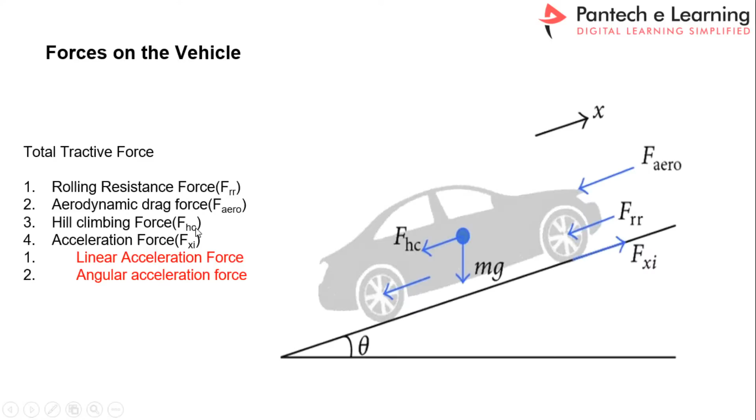Now let's start the discussion, continuing yesterday's topic. Whenever you want to calculate the total motor power, the exact required motor power, you should know all the tractive forces. What are all the forces available on the vehicle? The first ones are rolling resistance, aerodynamic drag force, hill climbing force, and acceleration force. These are all the forces which we have to calculate.

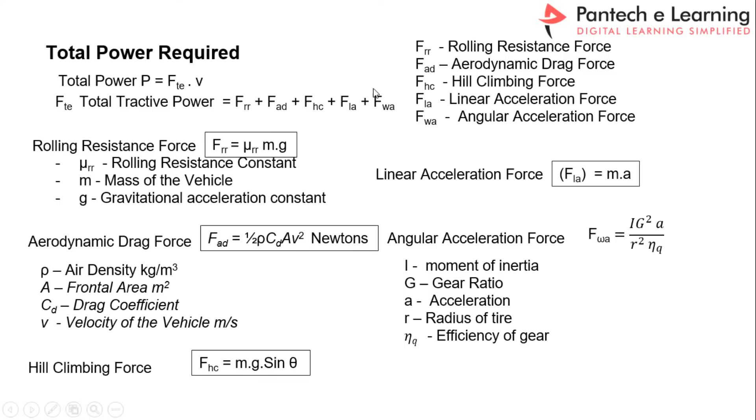Now just to recap the formula: the total tractive force Ft is equal to the sum of rolling resistance force, aerodynamic drag force, hill climbing force, linear acceleration force, as well as angular acceleration force. This is the total tractive force. If you multiply all these forces with the velocity, then you get the total tractive power.

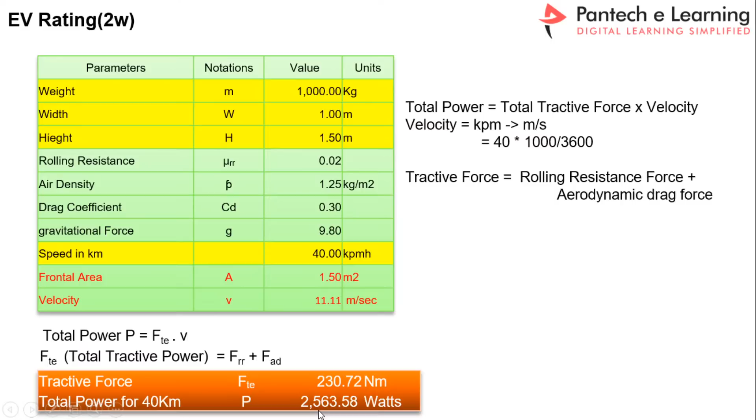Let us take the same example. We can calculate the total power for the 40 kilometer - the power required to climb 40 kilometers. Of course we need 2.5 kilowatt motor power if you apply the formula.

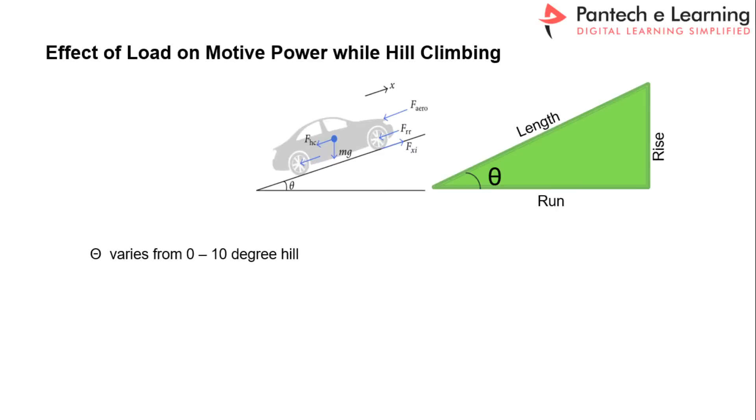Now if you include the hill climbing force, what will happen? Let us check one by one. Here I will show you the calculations, how you can develop the calculator. Just a second, I will show you the calculator.

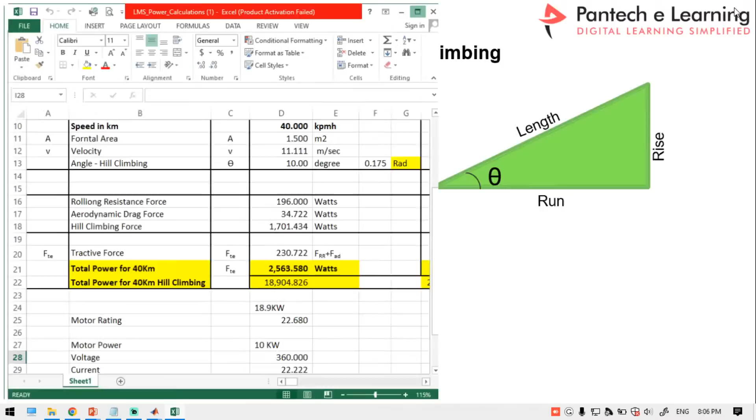So now we are going to analyze how the power may increase when you slightly introduce the grade angle. Let us take the same value and compare the same dimensions of the vehicle. Whenever your vehicle crosses that grade angle, whether it is upgrade or downgrade, not a problem at all. But when the vehicle is on the upgrade, then you need more motor power. So how can you calculate that power?

So here the angle should be converted into radians. To get the radians, you just take the particular degree and multiply by pi by 180, so that you get the radians. That is called theta.

So for the hill climbing force, if you have not compared, then without hill climbing, the motor power requirement is only about 2.5 kilowatt. Suppose if you are introducing a 10-degree grade angle, then you may require a higher value than that. See here, this is the total exact motor power.

So you have to calculate all the total forces. M into G, and I just add this value. See here, about 21.4 kilowatt motor power may be required. So this is the power variation.

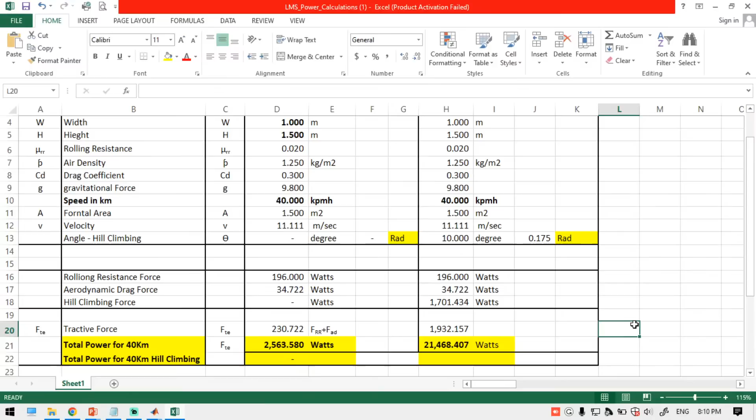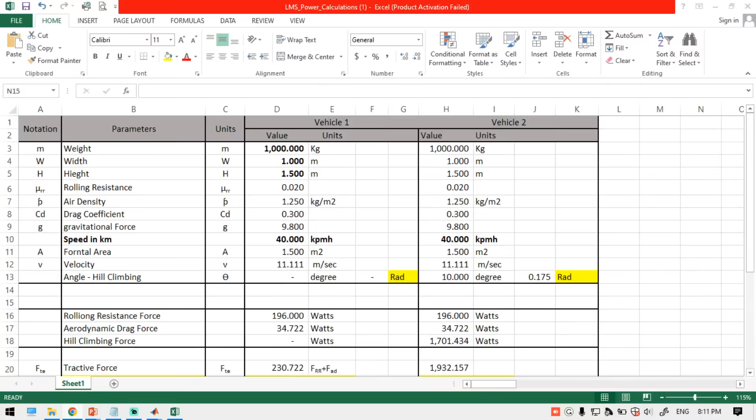Yes, so Amrita, what is your query? I couldn't... just a second. So the solver error, model error denotes that you have not included the f of x solver. So just include that solver into your any ground plane. In the Simscape workspace, you should include the solver.

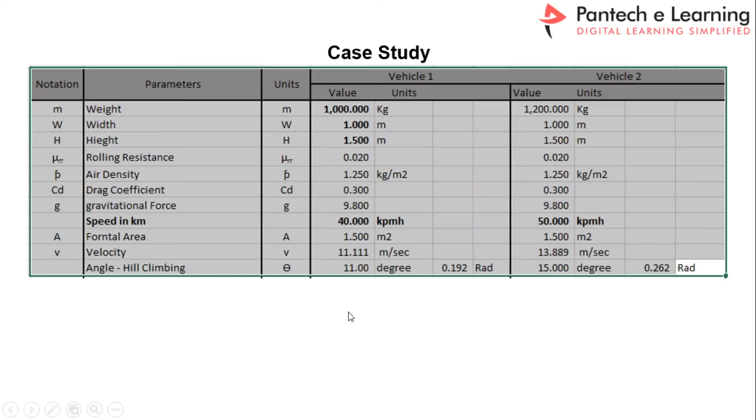So now let us take that simple case study, so from this you can easily understand the power calculations. From the power variation, the same may happen when the vehicle is in hill climbing conditions, when the vehicle is fully loaded to the unloaded conditions. So these are all huge power variations that may happen when you drive your vehicle on the road.

So how can you consider those conditions? Here, if you take the extreme conditions, which means if you are claiming 100% motor, for example 1000 kg loaded at a certain 40 km per hour, then in that case what do you have to do? You have to add 20% extra.

What do you have to do? You have to add 20% extra load, so in that case 1200 is the total load capacity of your vehicle. At the same time, for the gradients also you should increase the higher percentage. Then only your vehicle will get higher stability.

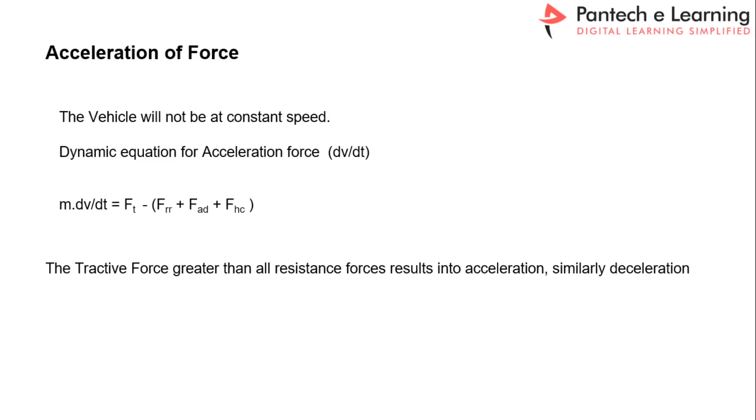Here, since the vehicle is not going to be at a constant speed, there will always be a change depending on your driver input as well as the road conditions. So now we are in the position to calculate the dynamic speed of the vehicle.

So while you design your vehicle, you should take all these factors into consideration. Now let us take this one, see here.

It's about 350 kilogram will be the total value. So this is the 250, this is the 350 value. Let us take the 350 value, and now let us try to solve this one.

See, the gradient is in the negative gradient, so the speed will be in the positive. Let us assume this is 40 km per hour.

Suppose if you increase the vehicle weight, instead of 350 kilogram, to 1000 kg, let us check what will happen.

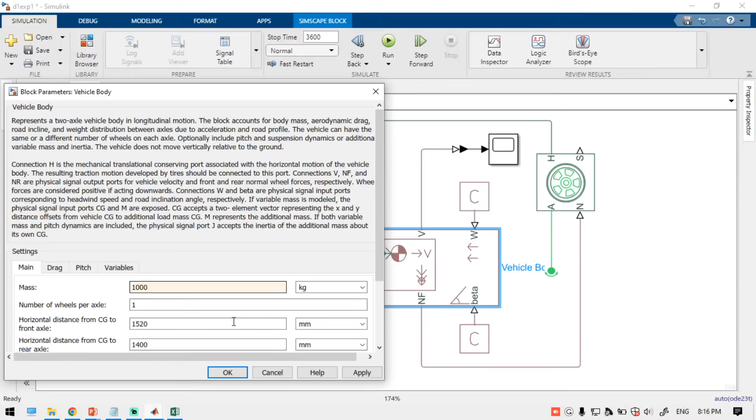So definitely, if you increase the weight and put the vehicle in the down gradient, what will happen? Can you just comment? If you increase the vehicle weight and put the vehicle in the negative gradient, what will happen? Can you comment whether the speed will be increased or decreased? Can you say yes or no?

The speed will get increased or decreased. Earlier it was 40 km per hour, now I have increased the vehicle weight. So now see here, earlier case it was 40 km per hour, right? Now the speed has doubled, about 70 km per hour, because the vehicle weight did not decrease, it increased. Yes, exactly, Mr. Darshini, that's the answer. So the speed will get increased due to the vehicle weight increase.

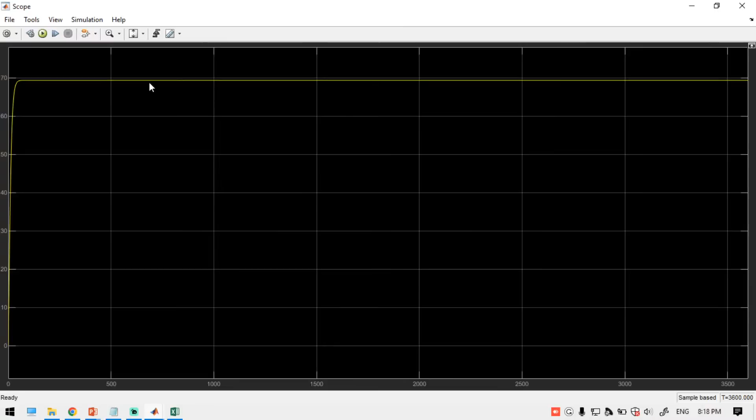Same way, in that case we need more motor power to operate your vehicle. Now let's come to the point: if you want to drive a motor, this should be positive, then the motor will get forward direction. If this should be 0, then the motor braking will get applied, and the motor comes to the standstill position. Like that we can understand the dynamics of the behavior.

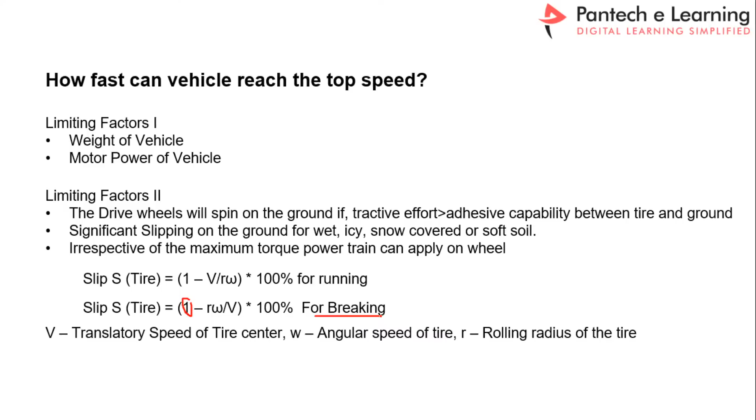From this calculation, at the initial stage the motor torque and speed will be 0, this is the 0.0 position. Now you have started your vehicle. What will happen? See here, the speed will be 0 and it will try to increase maximum from 0 to maximum.

So the speed will get increased from 0 to maximum. In that situation, what will happen? Whenever the speed is very low, the torque should be high. That is the motor's responsibility. The maximum torque should be delivered by the motor till its critical speed. Do you know what is critical speed? The critical speed is nothing but the rated speed with the rated condition, loading conditions. That is the critical speed.

So this region is called the constant torque region. During this region you can handle the maximum load, but the speed will be less. After the critical speed, the speed can increase at a certain stage and not more than that value, but you can go more than 20% of the rated speed, though the loading capacity may get reduced.

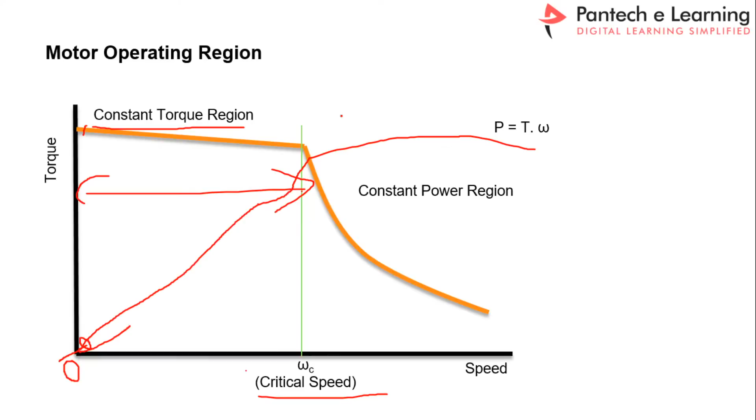From this graph we can easily understand that the motor has a critical capacity, a critical speed behavior. Till that critical speed, the motor will deliver maximum torque and maximum speed. This is the safe operating region, where you can handle both values - you can operate the load and you can operate the speed. But if you need more speed with less load, with less speed available, then this is the region.

That's why your vehicle is in very low speed when you drive it. If you take an IC engine, the vehicle will handle more weight when it is in lesser speed - like first gear, second gear, third gear, it can handle maximum load.

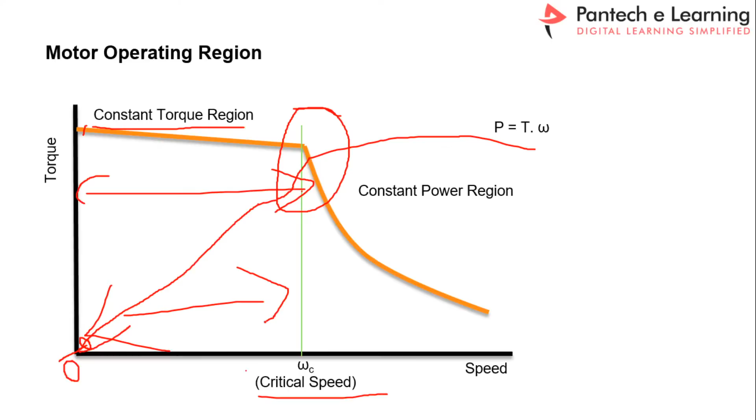Now here I am trying to give you an example of some typical motor data, vehicle typical data - the weight of the vehicle, drag coefficient, rolling resistance, and area. The gear ratio is about 11, the vehicle wheel is about 0.3 meter, and gear efficiency is 95%. For these dimensions, the motor power is 102 kilowatt at 7000 rpm. For this motor we can take 140 Newton meter. This data we have to get from the data sheet.

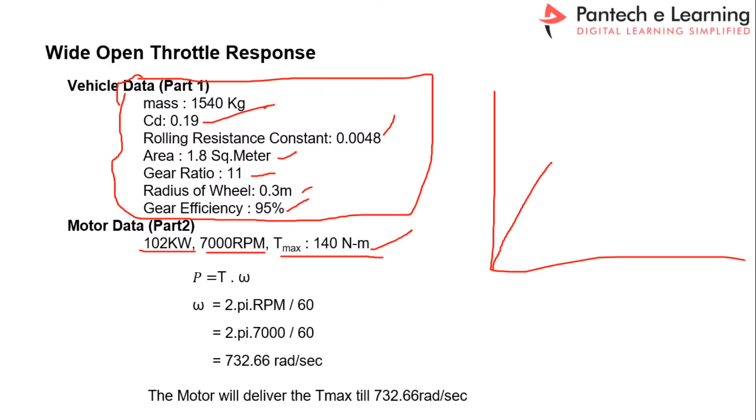So now at what range can the motor deliver 140 Newton meter, because this is the rated torque of the motor? If you apply throttle from 0 to maximum, slowly the vehicle will move, right? So the graph will get linearly increased - this is the radius, so gradually it will get increased. For example, in this region you may get 140 Newton meter.

This region you can get 140 Newton meter. At this moment you can get 140 Newton meter. Let us assume this is the critical speed - like 732.66 is the critical speed, right? Radian per second is nothing but angular velocity, so we have to state it in radian per second. Let us assume this is the critical speed - till that area, the motor will deliver 140 Newton meter. Once the motor increases beyond this limit, then the torque will get reduced.

So the advantage of the electrical motor is that by implementing FOC algorithm, or vector control algorithm, or direct torque control algorithm, you can program the torque as well as the speed. This is the main takeaway from this slide.

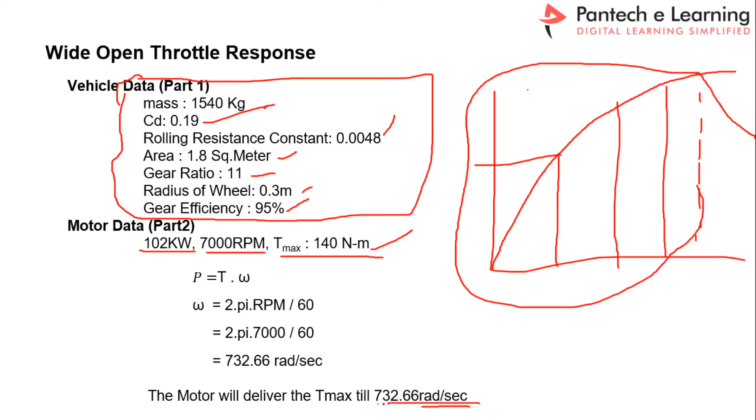And the same way, what is the maximum velocity of the vehicle? The motor critical speed is 732.66 radian per second. The motor is generating the speed rotation, and that rotation has been converted to the vehicle. So now what is the critical velocity of the vehicle? At this range of 140, just apply the simple value and you may get this value - 19.8 meter per second. So this is the critical velocity of the vehicle.

So up to this, whenever you drive in this range - from this you can convert into kilometer per hour. Simply apply the value and calculate it. Till that value you can get an exact full load torque, and there you can operate the vehicle in a very safe zone with the speed and torque. I hope you understood.

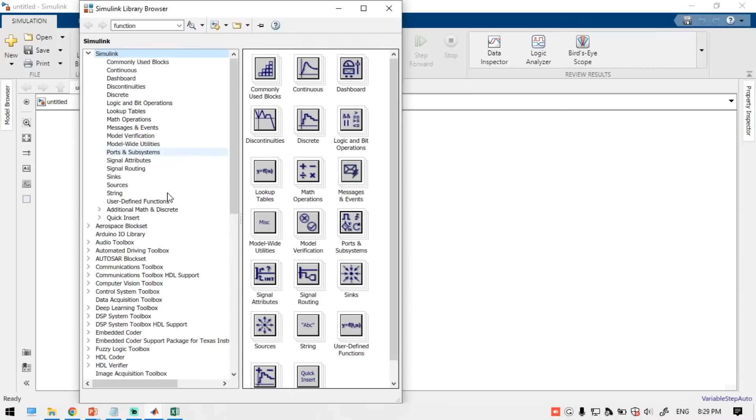See here, with MATLAB you can do any kind of logical operations. So to understand the logical operations, see here, all the mathematical functions are there.

You just click this button and you may get an add block. You can do the add block, and you can take a bits operation called gates, logic gates, all the logic gates.

For different motors, see the motor power is only the constant, so all the calculations remain the same for all the motors. Here we discussed only the vehicle dynamics, not the motor dynamics.

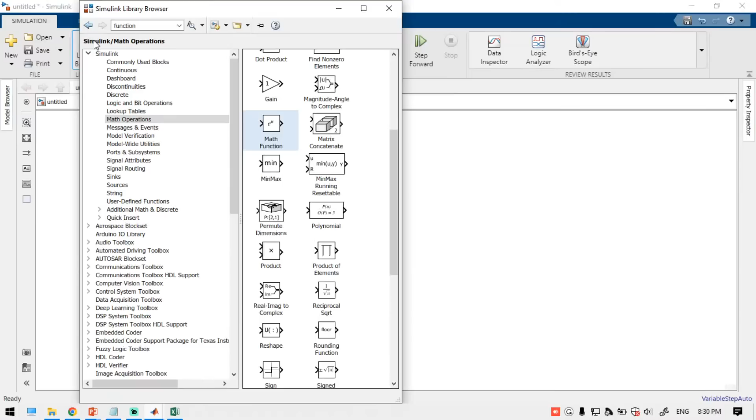So I will show you some simple logical functions, how you can develop them, where you can start. Just take a bits operation, let us take an AND logical operator.

Now I will tell you how to generate and compare two signals. I'm just going to take two signals. One is a square wave, see here, I'm just taking the square wave.

For the square wave, can you tell me what are the parameters? If you take this one, see here, let us assume this is the square wave.

Let us take this as the starting point at t equal to 0. This is the starting point, t equal to 0, and again at this moment t equal to 0, this is called the on time, and this is the off time. Now the entire full cycle is called a period, and this we can call the on time, and this we can call the off time.

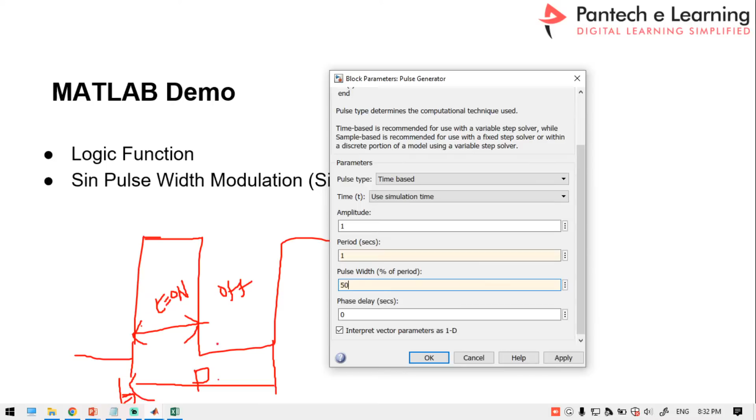This is the on time. People will express it as a percentage of the period. So if you keep 50, that means 50% exactly on time of 0.5 seconds, and the remaining 0.5 seconds it will be 0. If you apply this, you may easily get the answer.

So take a scope block, just take a scope block, just take this scope block. Now you may get the value of the square function, right?

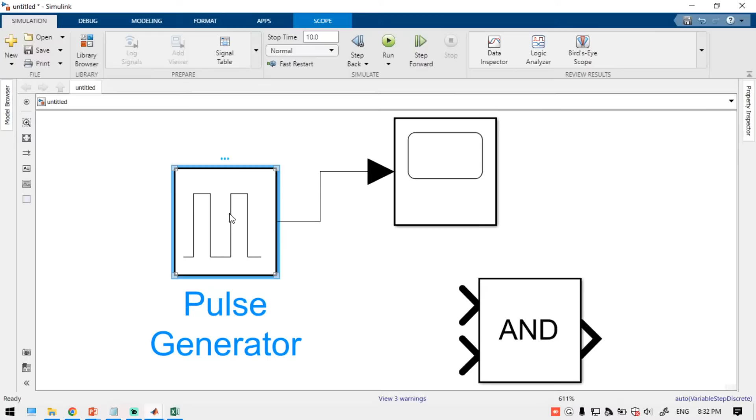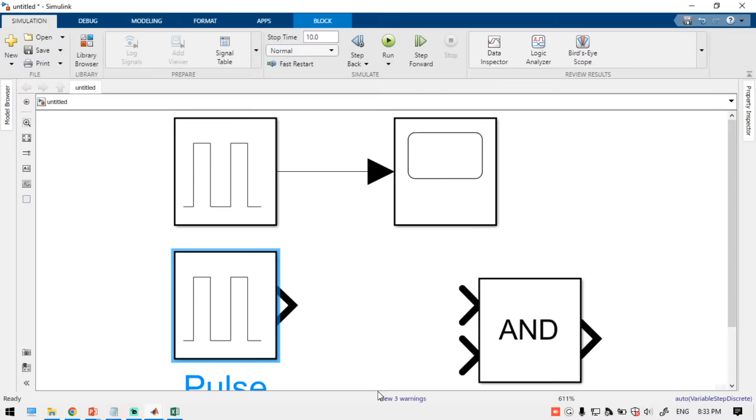So this is the simple square wave generator. Now if you take another waveform, for the same 50%, I am going to have a 2 second period. So just take this value.

We can modify the scope parameter by selecting this control settings parameter function, and here you can take 2 scopes with a different level. You can change the layout also.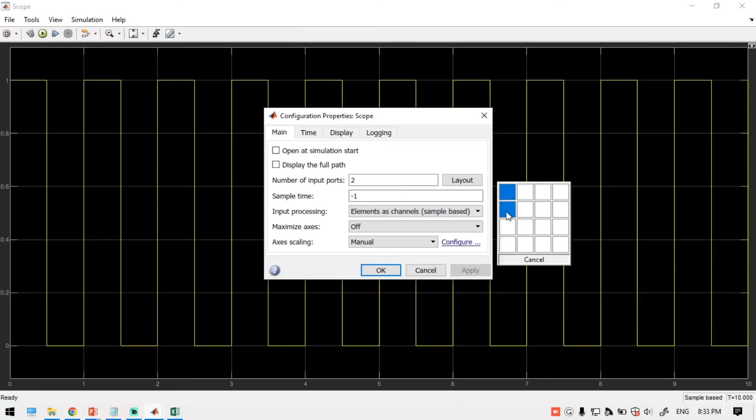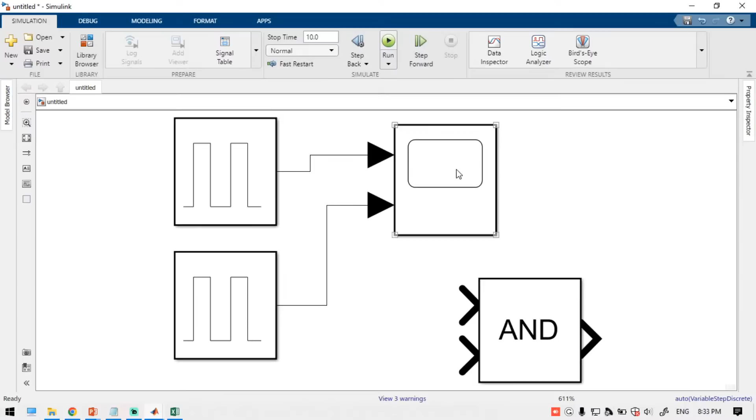So now if you try to run this simulation, see here, this is the one wave and this is the second wave. This waveform is repeating at 1 second, and this waveform is repeating at 2 seconds.

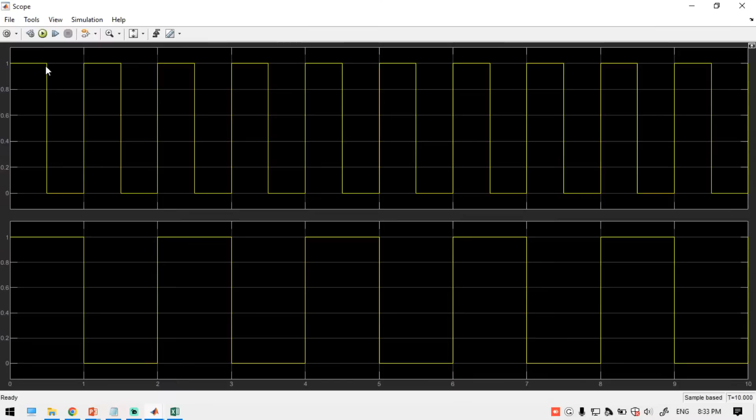Now if we compare these two signals, if you apply the digital logic AND gate, here we can get another waveform.

See here, if you increase the value, just change the layout. The idea is whenever the AND gate functionality is such that both signals are high, then only the AND gate output will be high. So we are applying 2 inputs and we are getting the output.

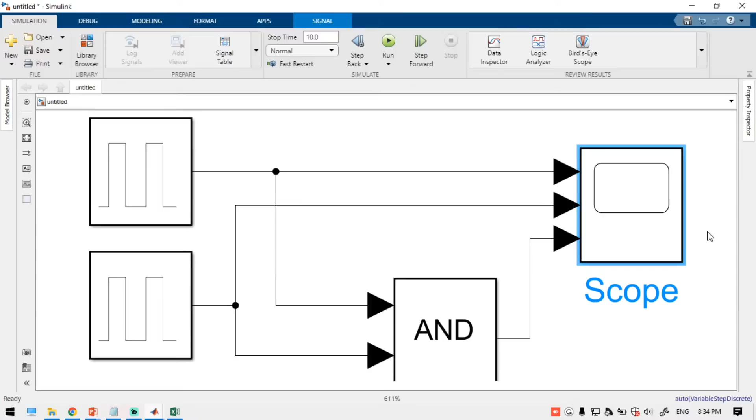So this is the logic, some simple digital logic we are getting, and we can create any kind of similar digital logics. I hope you understood.

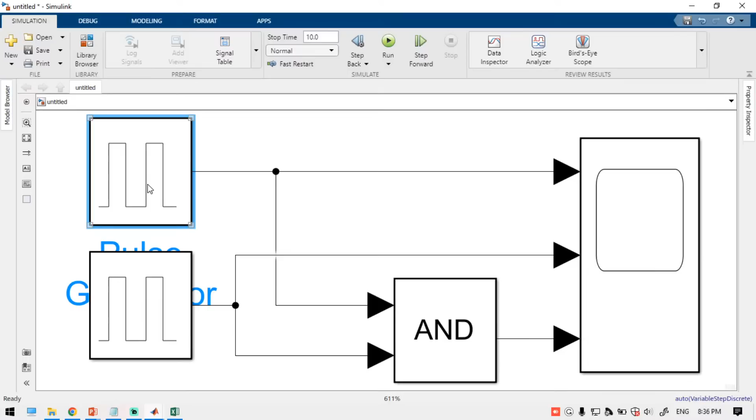So now, yes, now it is resolved. So this is pulse 1, repeating at 1 second with 50% duty cycle. Same way, this is pulse 2 for a 2 second period, again with 50% duty cycle.

And these 2 pulses, simply connect them like this. I will show you, just drag this button and connect here. Same way, just drag this button and connect here. Now at this point, you just right click, select the line wherever you want, and then you can connect here.

So now if you run this one, you may get a different value, you can get output. So this is the pulse 1 input, and this is the output pulse, this is the gate output, the AND gate output.

This simple logic which we are discussing, we can use any kind of gates, not a problem at all. If you select this one, all the gates are available. I am sharing this experiment for the purpose of your applications, when you need to generate customized signals, then you can use this kind of signal.

Now, in electric vehicles, we are going to utilize an electrical motor, and that electrical motor is controlled by pulse width modulation. Do you have any idea about pulse width modulation?

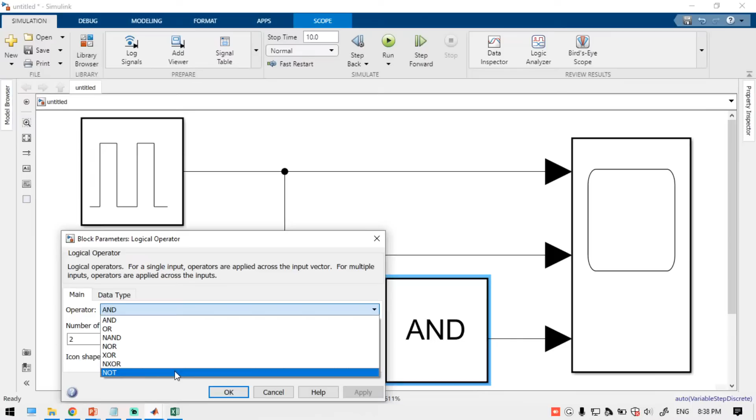So the pulse width modulation is nothing but a controllable value. See here, we can adjust the pulse width. This is the simple PWM signal, and by changing the logic,

this pulse width may be adjusted. So this pulse width D is directly proportional to your motor speed. Now we have to adjust the pulse width, how we can adjust it and all, I will tell you one by one. So just engage the class.

So now I am going to add a few more signals, just to take a sine pulse with a sine wave.

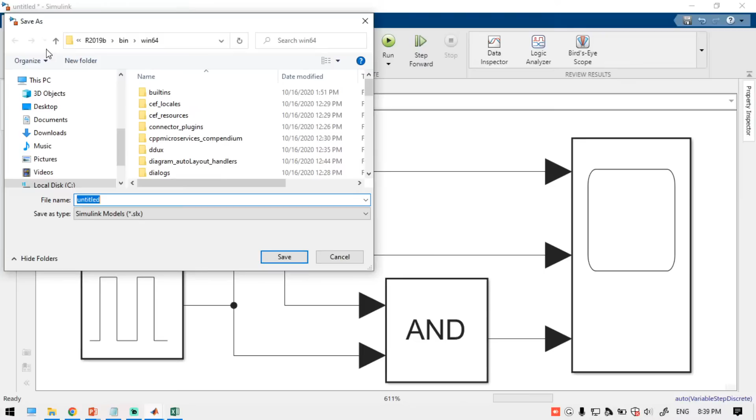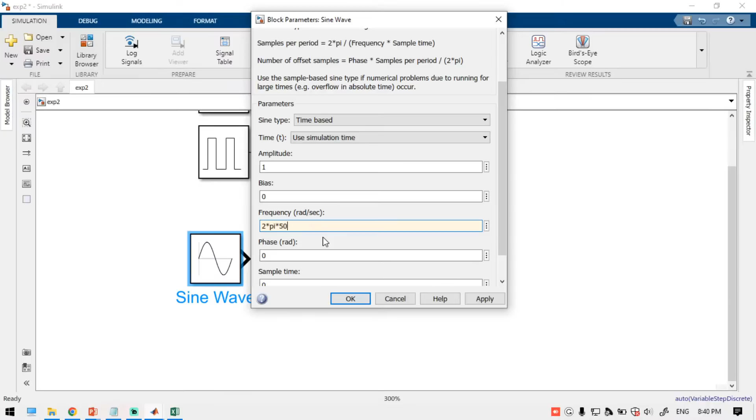So now we can get a sine waveform. This is the 50 hertz pulse. So in that 50 hertz, you should reduce the value. I'm just reducing the value at 1 second.

I will show you the simulation parameter graph. Please try to engage with the class.

So just open the scope, change into 4 signals, and change the layout also.

So now I am just trying to run this simulation.

See here, this is the typical sine waveform, but it's not an exact sine. We have to increase the mathematical calculation accuracy. How can we increase the accuracy?

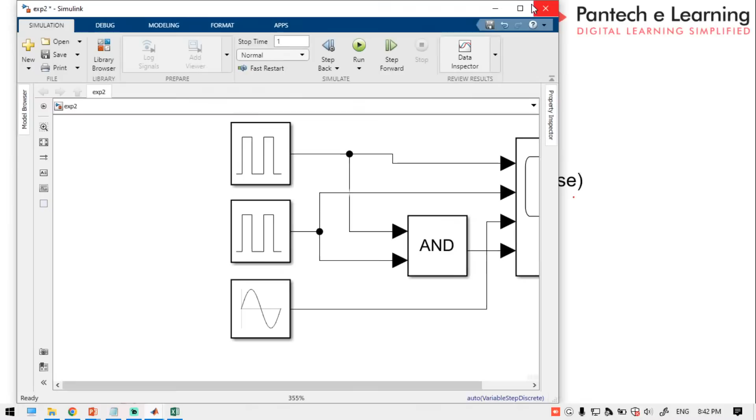Just open the simulation parameter, go to debug mode, open the parameter. Just select this button here, where the solver information will be available. Now we are trying to improve the accuracy of the simulation.

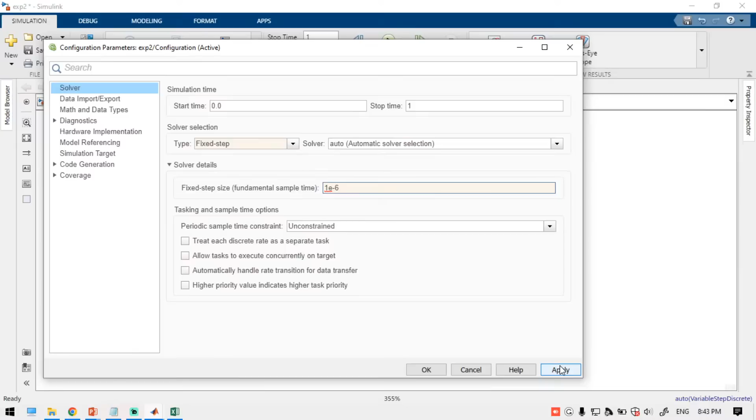So just select the fixed step, and apply 1e power minus 6. Alright, and now you can run this one.

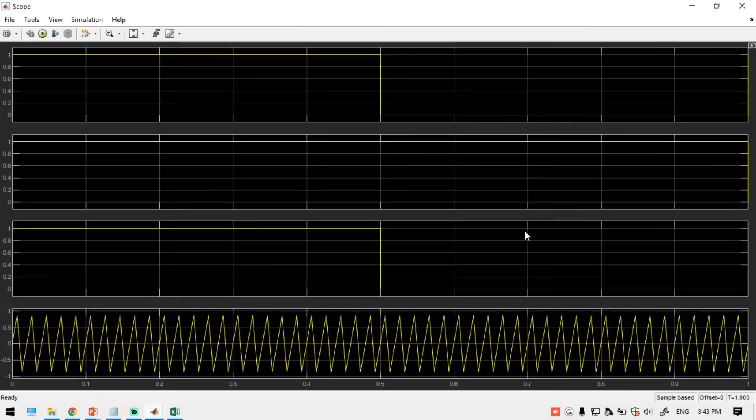So you can get a pure sine waveform. Earlier it was not a pure sine waveform, now it is. So by this method we can improve the accuracy of the simulation. I hope you understood.

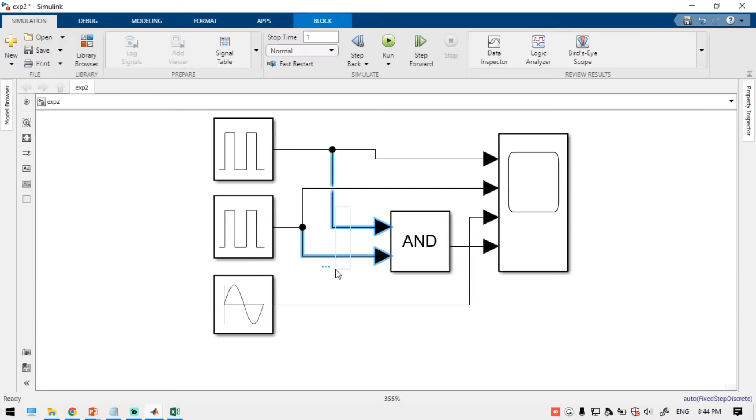So now I am just going to remove this one and take this graph. Instead of a square pulse, I'm going to take a triangular waveform. I will tell you how to generate a triangular waveform.

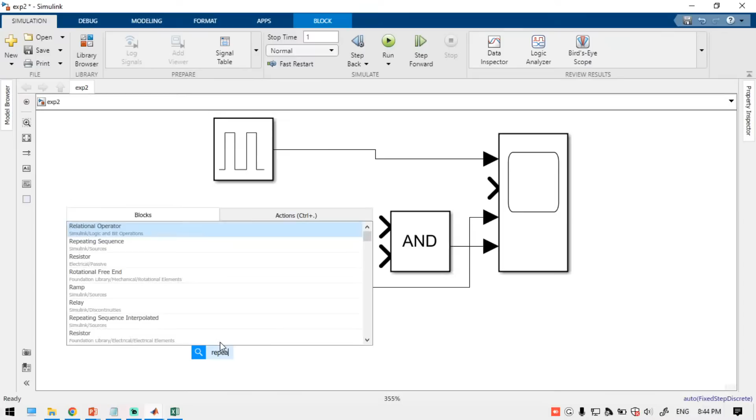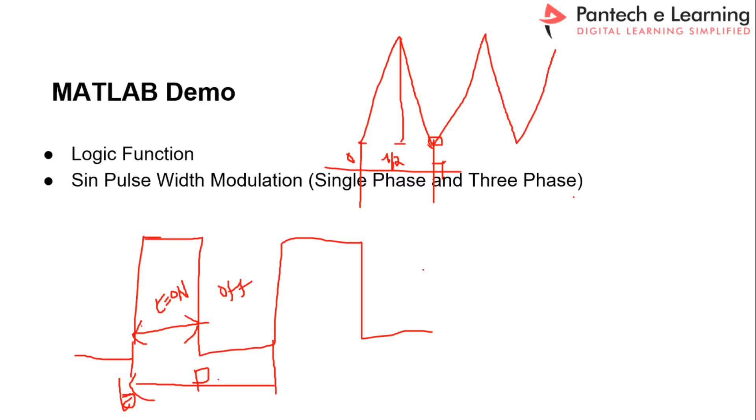Take a repeating sequence. So now we have to generate a triangular waveform like this. This is the total time period, 0 value, and this is t, and this interval will be t by 2. At this moment x-axis 0, y-axis 0. At this moment x-axis is t by 2, y-axis is 1, and this moment is the full cycle. So at t equal to 1, x-axis is 1, y-axis is 0. Like that we have to generate a triangle repeating sequence pulse.

So now I am just going to take this one. Time value we can keep 0, 0.5 (that is 1 by 2), and 1. Output value: x-axis 0, y-axis 0; then 0.5, 1; and 1, 0. So at 0 this is the first moment, at t by 2, x-axis t by 2, y-axis 1, this is the second variable, and x-axis 1, y-axis 0, this is the third instant. Now this is the time value, so we have to add the frequency, 1 by frequency, let's take 1000 hertz, meaning 1 divided by 1000.

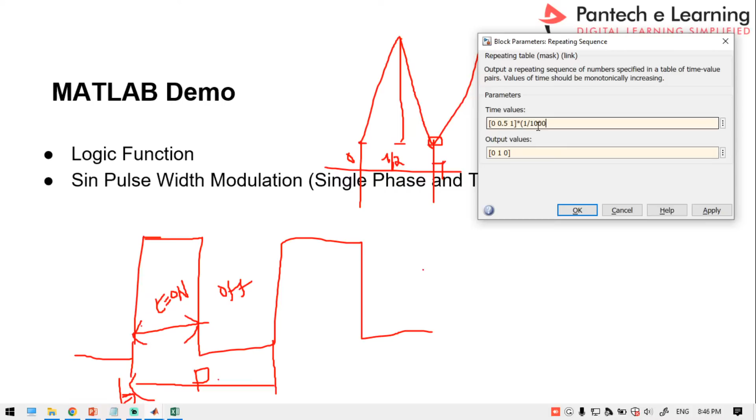So the inverse of frequency is the time value. Just apply it and you will get a triangular waveform. So just to compare these two values, now one graph will be the sine waveform, one graph will be the triangle waveform, and another graph will be the square function.

Yeah, see here. So we can adjust the graph value, just select this graph.

So this is the sine waveform, this is the triangular waveform, and this is the square waveform.

Now if you compare these two values, take a logical operator like AND gate or OR gate. So if you want to compare the values, just take this relational operator, take the sine function and the triangular function. Now you can apply this value and compare. Whenever the sine is high compared to the triangular, the output should be 1, otherwise the output should be less. Just take this value.

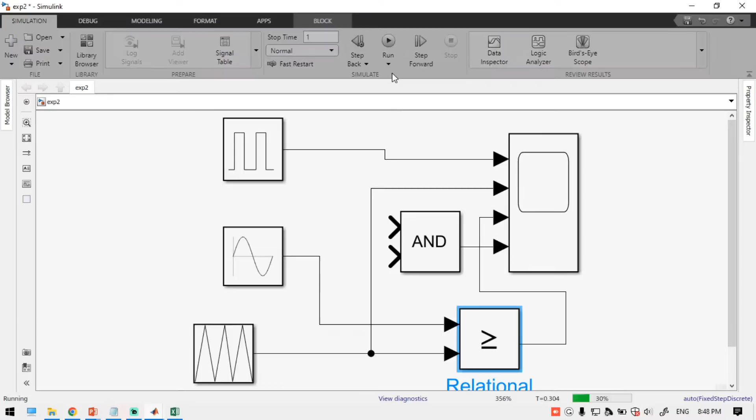Okay sorry, I will just reconfigure this one. Just a second, I will remove this one.

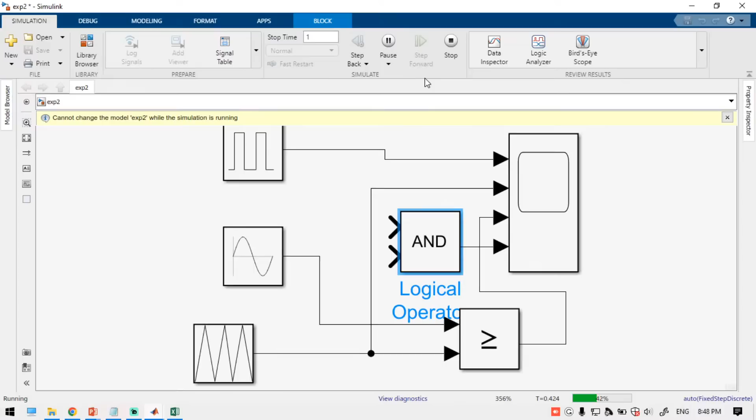Let us take a sine function as the first graph, triangular function as the second graph, and the third function is the output graph, the PWM generation. So this is the third graph. Now we can analyze that.

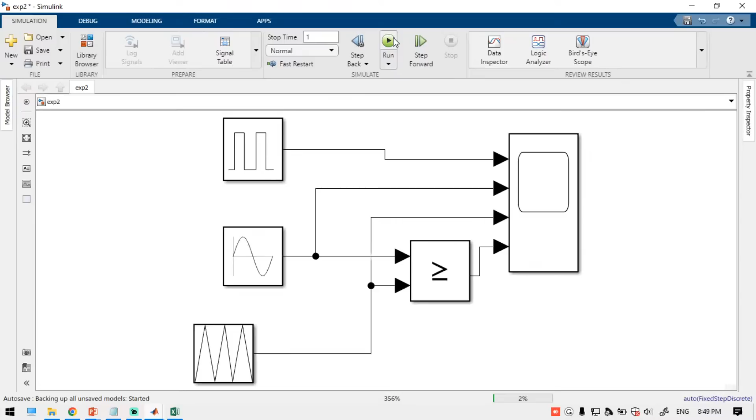See here, we have compared: whenever the sine waveform is higher than the triangular waveform, only then the output will be high, otherwise the output will be 0. So like that we can generate a sine pulse width modulation for the inverter.

I will tell you where you can use this PWM in the next forthcoming session, so try to engage with the entire session.